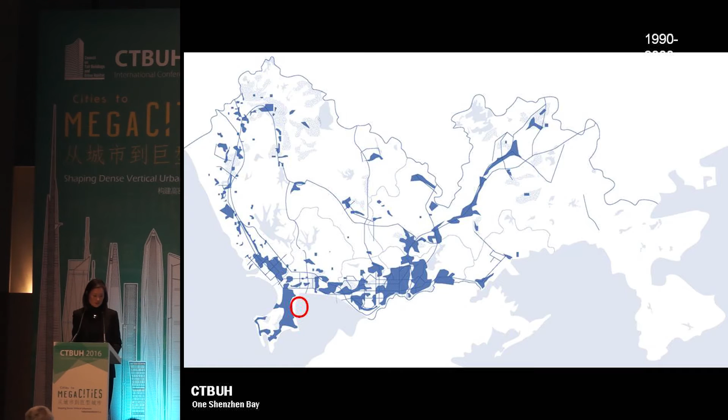So these are maps showing the growth in decades. The red circle is where our site was, or is. It was a series of villages. And then over time, this is the first decade of development, really, and the roads and development grew in the blue areas. And then in the following years, these areas started to merge. We started the project in 2009.

And then from this map, one can really notice where the areas are not blue because of topography and natural landscape elements. These become natural open spaces within the city boundaries. When we first looked at the site on Google Maps, it was still water, and it took a couple of months for it to catch up.

But in the Houhai district, because of the prevailing winds, the air is much better than the rest of the city, and so it's a beautiful site with great views across the adjacent public park to the bay and the city beyond. And then to the southwest, there are mountains.

So we really asked ourselves, what is the identity that we wanted to capture? And there really is no historical typology in Shenzhen because the city grew so rapidly. Also, we found that most people above a certain age were not from this area. It's a city of immigrants. And so there was no nostalgia. There was no sort of memory of a past.

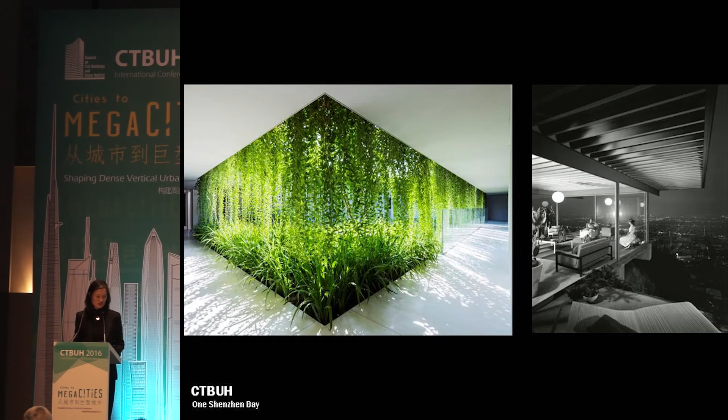These are two images that we really found very inspirational. The first one on the left is of a relationship between the inside and the outside, but nature is in contrast to the built environment. The other image also shows this great connection between inside and outside, but it also captures this really great aspect of high-rise living where you're kind of floating out over this amazing view. And so we wanted to really combine these two images.

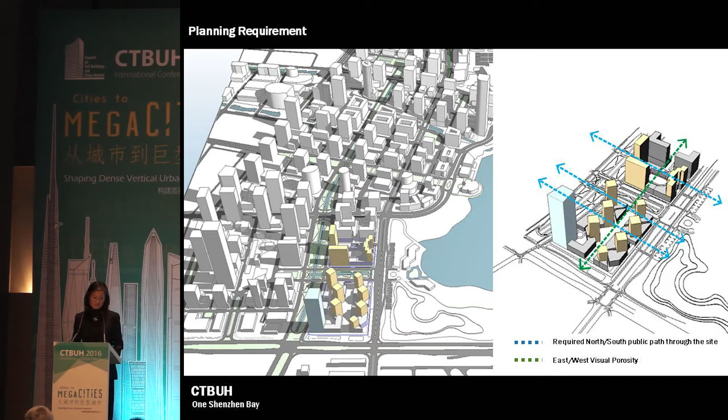There were 2 planning ideas that we had to keep. One was this north-south pedestrian passageway through the site, and the other was an east-west visual porosity. So in starting to think about how we would distribute the buildings on the site, the area grew, which was great, but we really didn't want the traditional podium in the middle of the site with a tower on top, and then a little bit of green space around the periphery that really doesn't become much used.

And so our strategy was to push as much area as possible towards the edges of the site. In this way, we could open up the middle of the site to create large green residential gardens. We also felt it was important to promote this idea of pedestrian and a walkable city. In other parts of Houhai that have already been built in 2009, it was very walkable. There was a lot of retail along the streets, and so we wanted to have street edges. We wanted to have retail along those streets, and we wanted it to be very active.

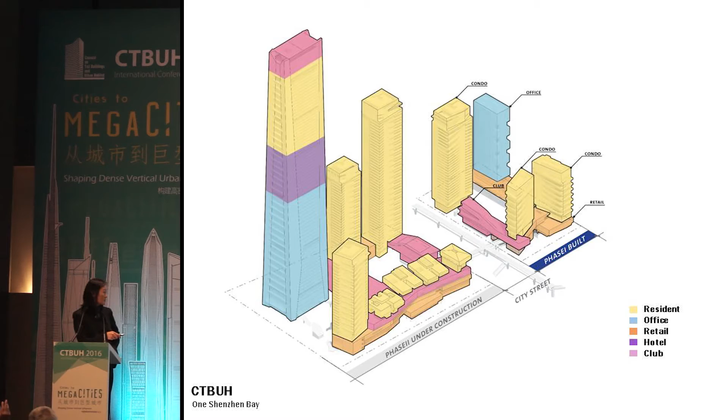So there's 6 residential buildings in yellow, as you can see. There's an office building to the northwest corner, and then the 340-meter mixed-use tower at the southwest with office, hotel, and residential. There's also social elements, club elements in the pink, and hotel ballroom.

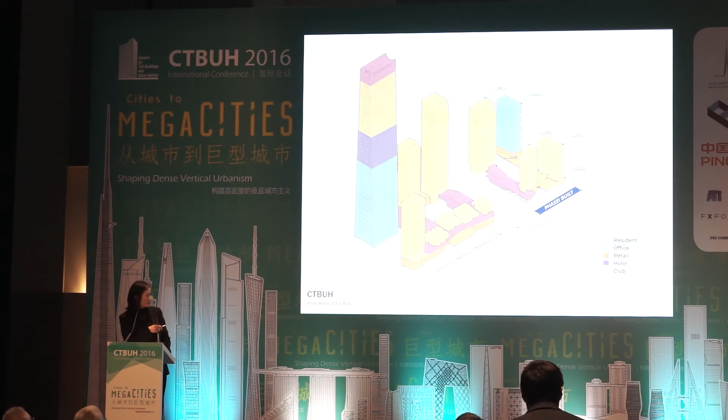So we didn't want to bring the public through the middle of the site on the ground level. We wanted to have this idea of street front retail, and we felt that going through the middle of the site would disrupt and discourage the use of sidewalks. So we thought of this elevated pedestrian passageway.

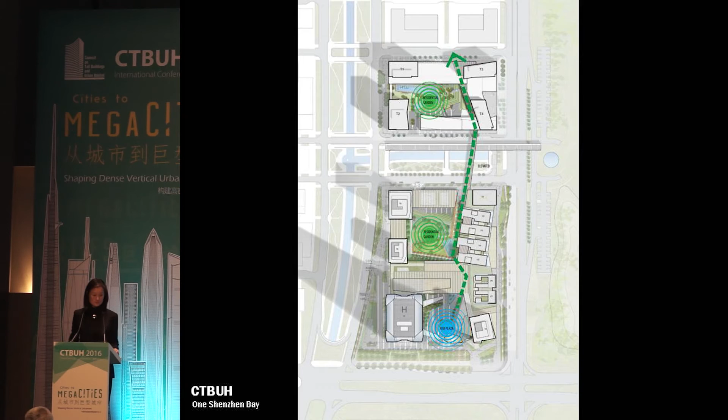And so it's elevated. It would connect the south block with the north block. There would be a southern public plaza right next to the tower, and residential gardens for both of those blocks. This is an early diagram of this idea of the elevated promenade and how it would meet the planning requirements.

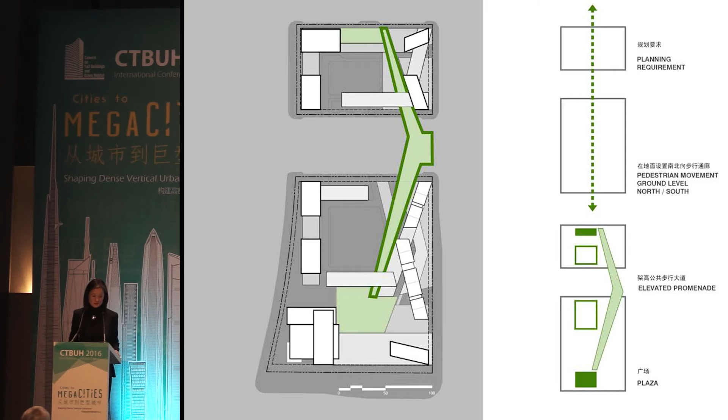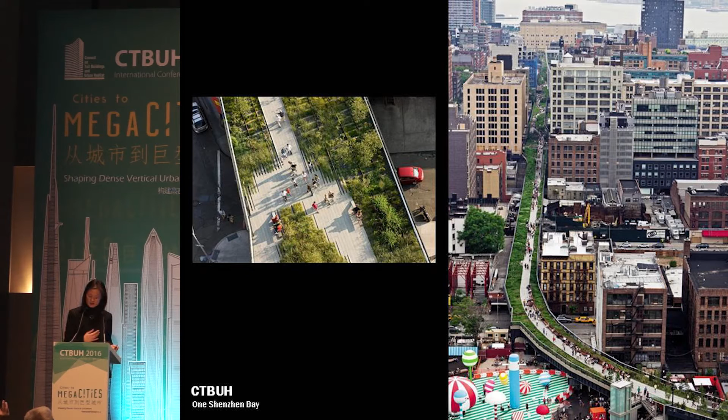We also like the idea of being slightly raised in this moment where the street is, so that it would have these amazing views over the park and into the bay. And we were also inspired by the High Line in New York. It's this ribbon of green that weaves through the city, and it's a really nice elevated park, and so we thought we could do something similar.

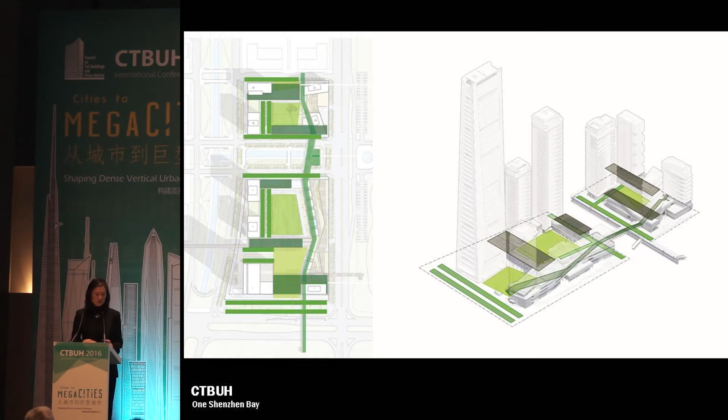This is another landscape diagram, and as you can see, it was really important for us. It really helped to organize a lot of the spatial planning of the site. This is the elevated walkway. These are the large public gardens. This is the public plaza. And then on these bars, there would be landscaped roof elements, so that this idea of greenery and nature really permeates throughout the site.

With the residential gardens, we really wanted a transition from this dense urban environment to your home. And so we thought that it would be nice to go through these gardens, decompress before going up to your apartment. And we felt that this experience really added to the idea of this dense urban living and making it more connected to nature.

Also, the idea that a lot of people would be going home by car, and that the car experience shouldn't be this small, dark hole going into a basement ramp. We also wanted the car experience to share this transitional moment. And so the idea was to combine these two.

And so here's a picture of the northern residential courtyard garden. The ramp going down really makes this into a sectional place. There's water and sculptural elements, and so it's very calming. And then also looking from above, it's also a really nice social gathering place.

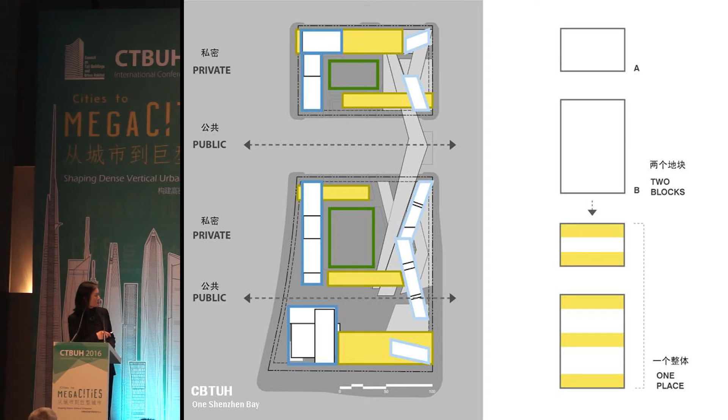Layered upon that is this idea of these bars. We were given 2 blocks, but we really wanted the spatial organization to make it a whole, to be one place. And so we have these east-west bars. They're lower, and they help define the streets, they help define the gardens, and they also serve to define private residential gardens with a public street, another private residential garden, and the public plaza.

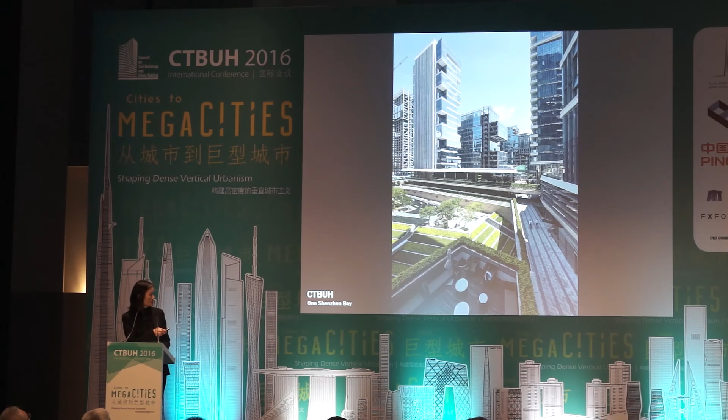So this is north of our site, and this is the Alibaba headquarters today. And so it's kind of nice that this kind of opening up of the inside of the block has been followed by them as well. To the north, this is the retail bar. There's a connection from the street on the west side to the elevated promenade.

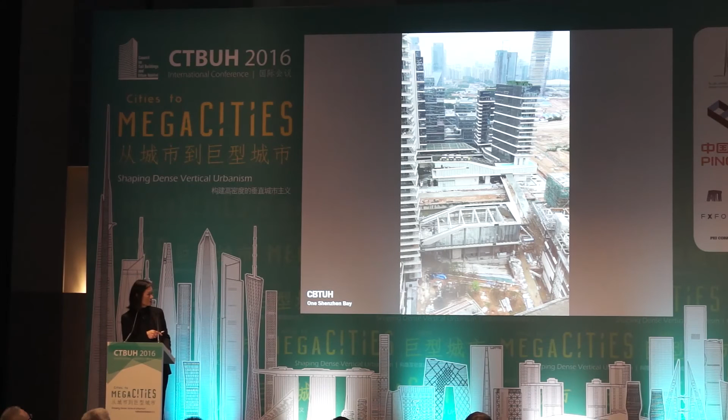And then this is a view looking down to this bar, which is an amenity club with a large swimming pool and a terraced deck. This is the indoor tennis court here, and the beginnings of the southern residential garden. This is a view of the pool at the top of that residential bar. It's quite spectacular with the views over the bay.

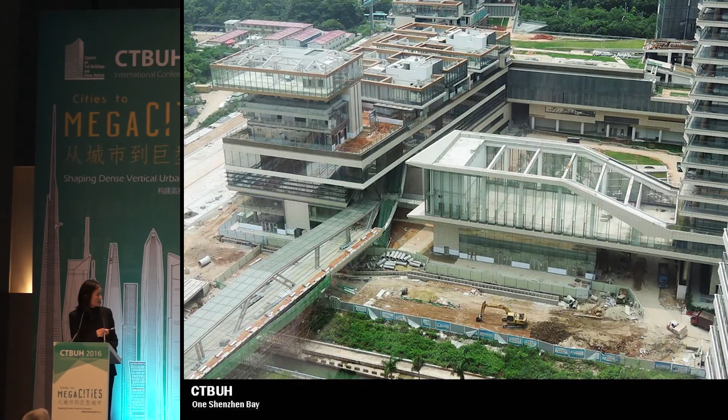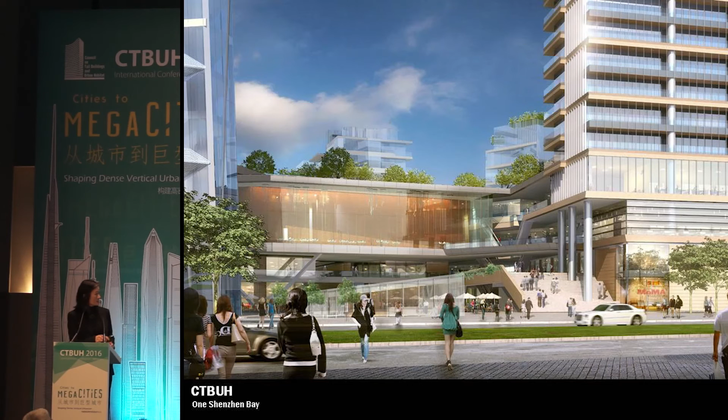This is the tennis court. And then beyond here is the ballroom element for the Raffles Hotel. This is an image of that ballroom element. This is the pre-function space opening out to the public plaza. These are stairs going up to the elevated promenade and retail. So this public plaza is activated by cafes and retail and the entry to the office building.

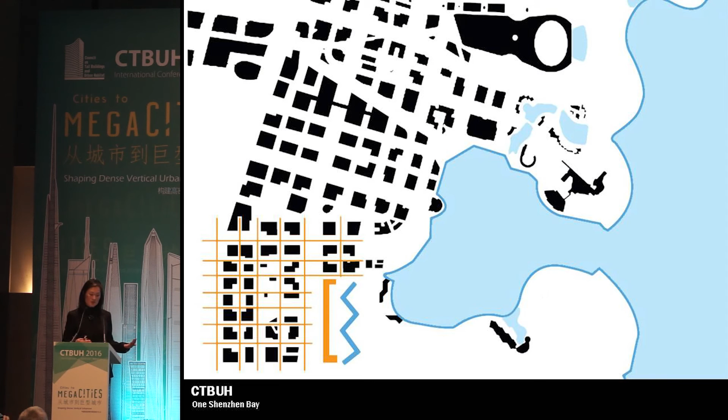We kept the western buildings more rectilinear to relate to the urban grid. And then the buildings towards the east, towards the bay, are a little bit more irregular. And in this way, we were able to stretch out as much length as possible that opens out to the view.

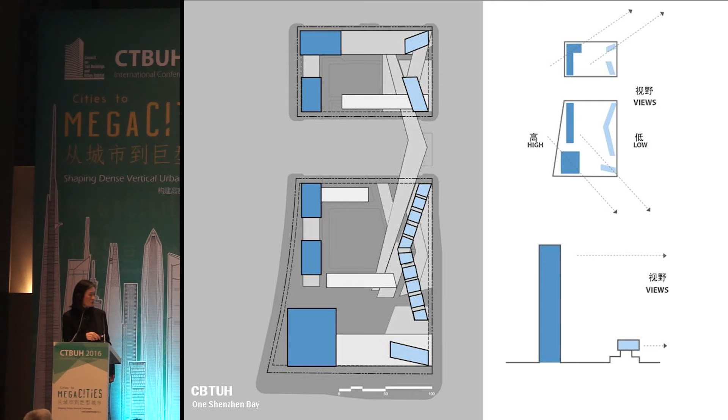Also, trying to get the view into the buildings as much as possible, we kept the lower buildings to the east, and then the buildings to the west are taller so that they could look over. This is a view from one of the towers on the north side, looking down onto the courtyard, past the buildings on the east to the view beyond.

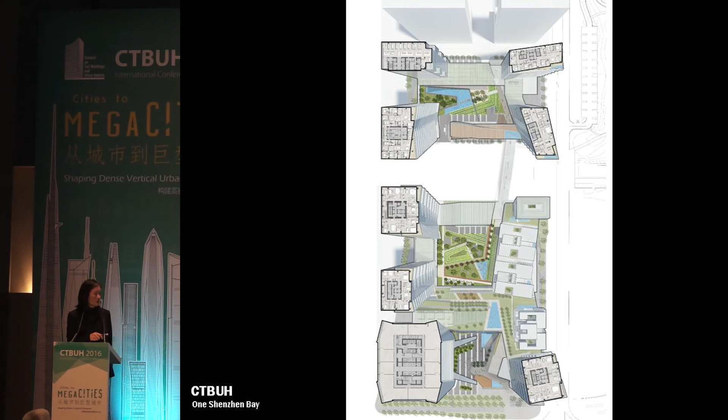The views to the southwest are also really great of the mountains. And then this is a view from the eastern balcony, looking back at the city. So we were lucky that a lot of these apartments are really big, and we were able to plan it so that the core and some of the service areas provide privacy from views by the neighbors. All the living spaces, all the master bedrooms try to get the view of the water.

So the towers have a relationship to the landscape, these residential courtyard gardens, but each individual unit also has a relationship to the exterior by balconies. So we wanted to amplify the idea of being outside on these balconies by trying to make, where there's a really good view, these 2-story balconies by alternating the balconies around the corner. These horizontal elements help guard the upper unit from looking down.

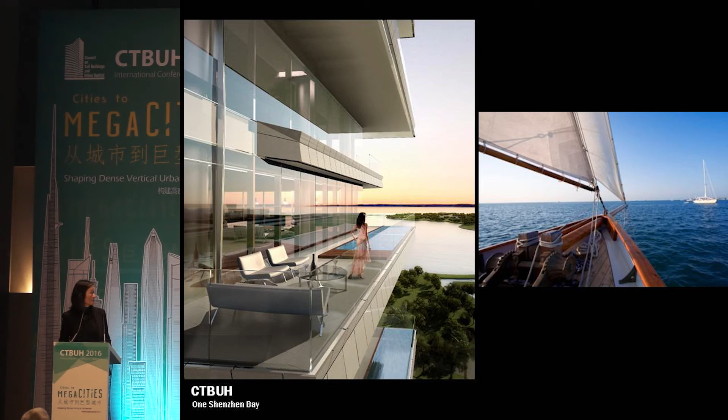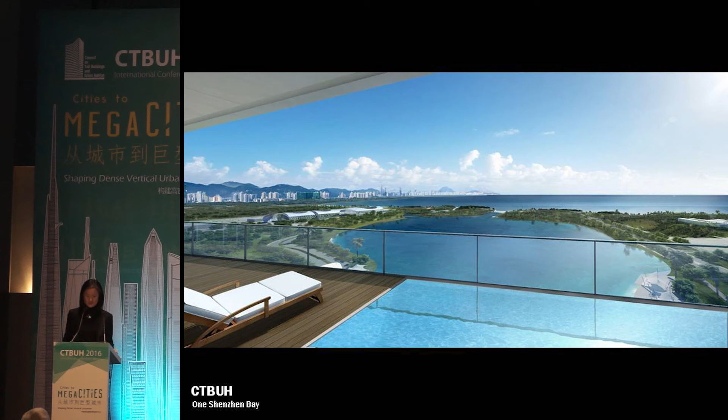And the idea of these courtyards with these balconies opening out onto the view and the water beyond, we wanted to have that be like being on a boat. So this is one of the balconies on the long side around the corner, also with a swimming pool relating to the water.

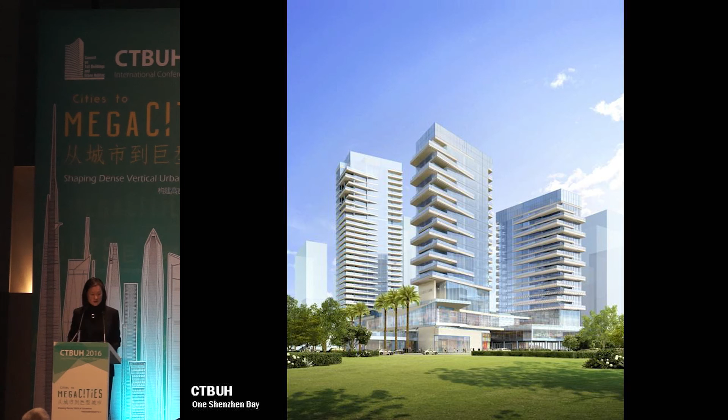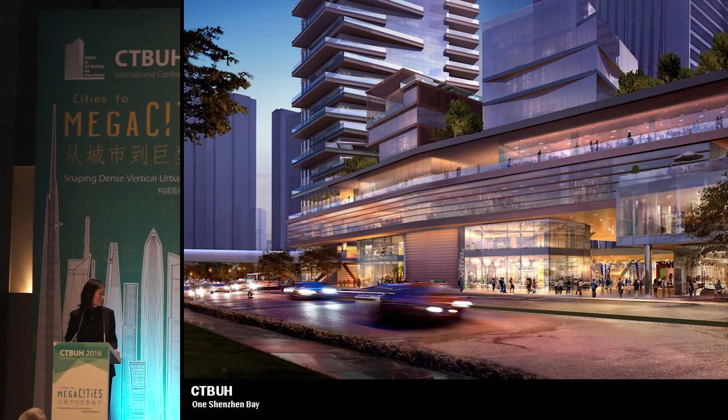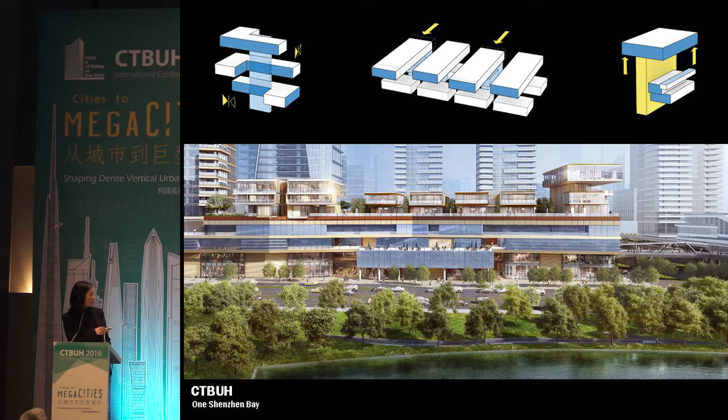Above the retail are these individual villas or clubs. There's 3 types, and each of them have a different spatial strategy that would try and incorporate greenery and have a relationship to the exterior. The roof of the retail is planted. So the largest villa is at the corner, and all the villas have a direct connection to the garage below, and then elevators up.

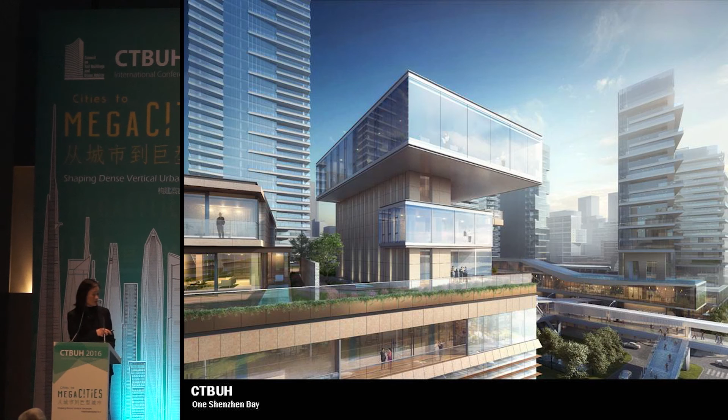And so by taking the elevator, it doesn't really matter whether you're arriving at the bottom or the top. And so we wanted the best views to be in the living area. So the living area is on the top floor. The bedrooms are below. And then between them is a private pool with exercise area. The cantilever helps to shade the pool. It also shelters this pool with privacy from the towers beyond.

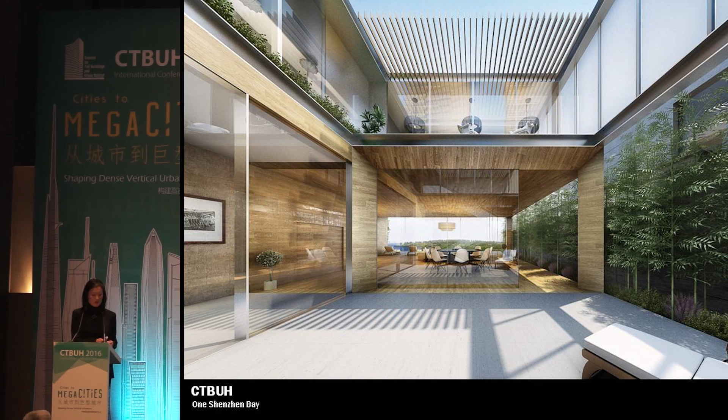There's 2-story villas. There's 4 of them, and these are much more traditional, with the living areas at the bottom and bedrooms on top. They have a private courtyard in the middle. So the living space that you see here and the master bedroom up above both have a relationship to the view and to this courtyard area.

The third type, there's 2 of these. They're 3 stories, and these also have a courtyard, but the courtyard opens out to the view. There are more casual recreation spaces on the bottom. Taking you up the stairs is the living area, and then above that is bedrooms. So here you see the villas floating above the retail, and then at the corner is the 340-meter mixed-use tower.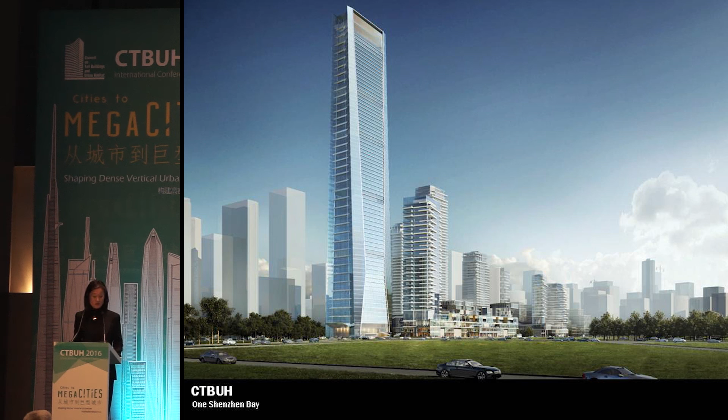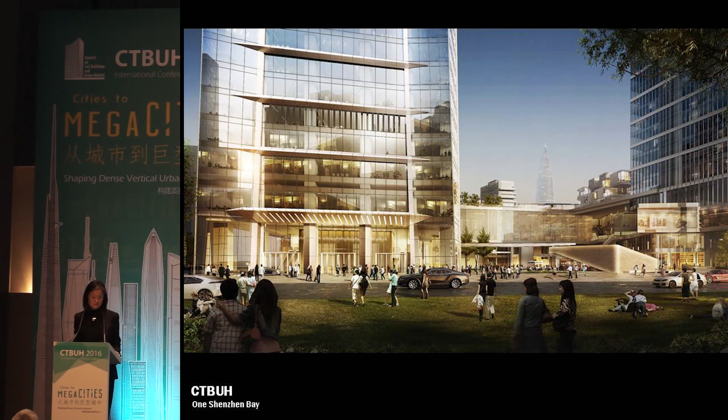This is the base of the tower, the entry with the plaza next to it. I have to hurry now because I'm running out of time.

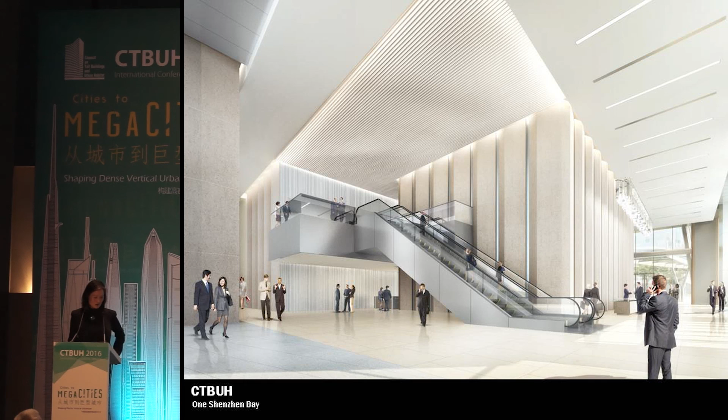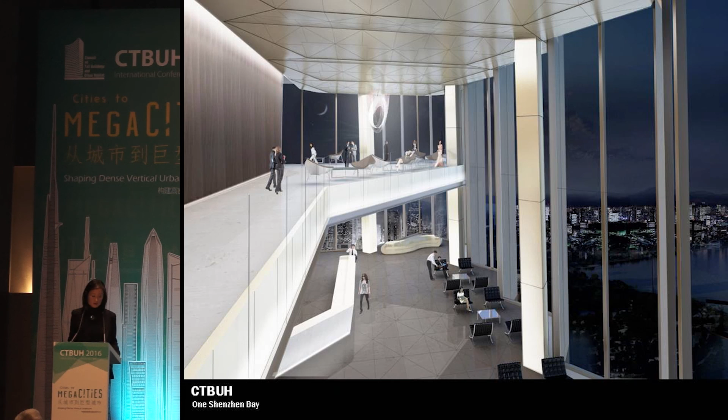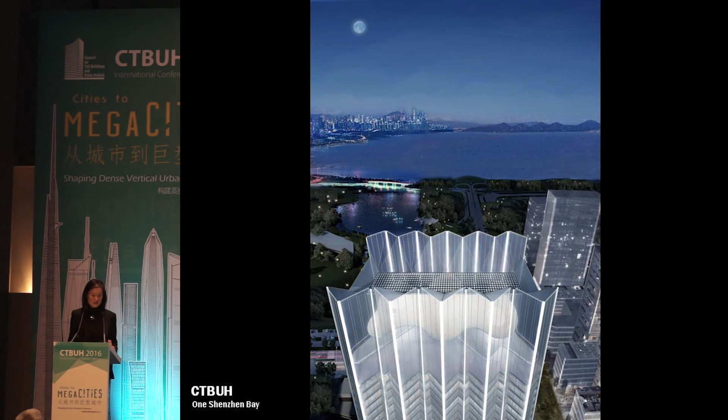This is the lobby with a mezzanine for these double-decker elevators. This is in the middle of the building. This is a very preliminary idea of what the space for the hotel lobby could look like. And then another early rendering of the top of the tower. There's now the helicopter pad. But as you can see, the views beyond are amazing. And then a view from the bridge to Hong Kong.

We hope that One Shenzhen Bay will be a welcoming beacon to Shenzhen from this border crossing, and that it would symbolize not only the presence on the skyline, but we really wanted to anchor these high-rise buildings to its neighborhood and to encourage a better neighborhood walking environment at the bottom.